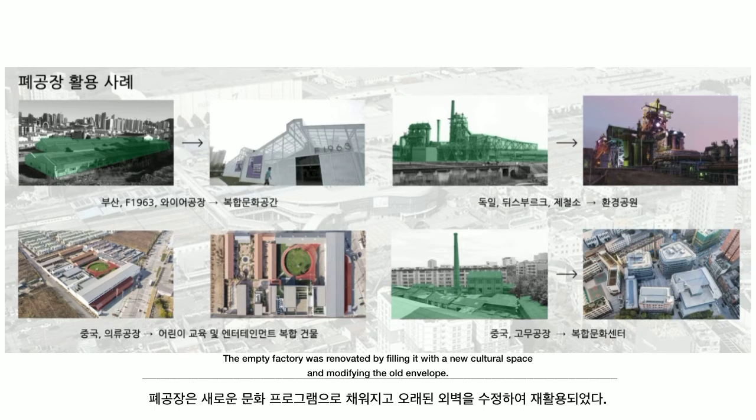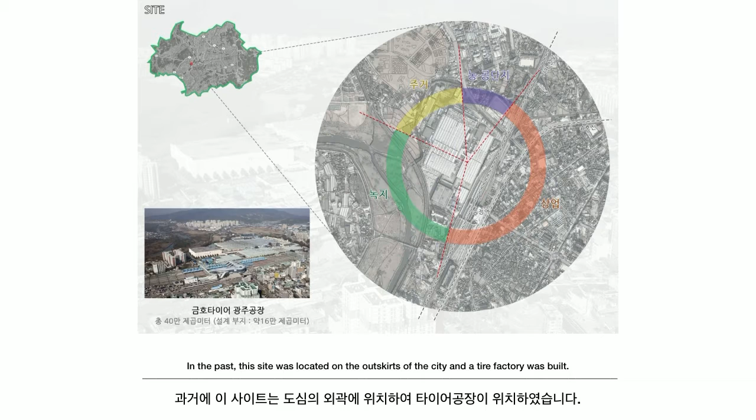The empty factory was renovated by filling it with a new cultural space and modifying the old envelope. The site I chose is Kumho Tire Gwangju Factory, located behind Songjeong Station. In the past, this site was on the outskirts of the city, and a tire factory was built there. The surrounding facilities include a large-scale housing complex, Songjeong Station as a transportation hub, Songjeong Traditional Market with Gwangju's signature taste, and an agricultural and industrial complex.

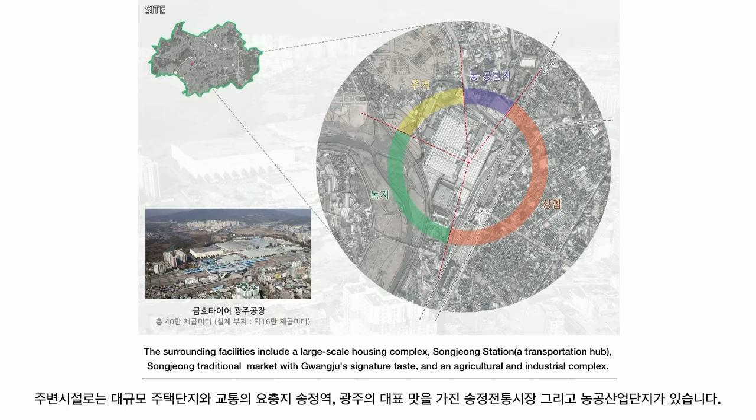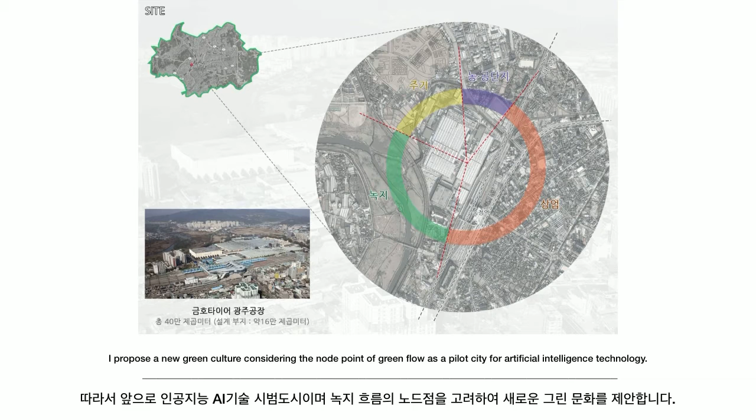However, cultural facilities are insufficient compared to residential facilities. I propose a new green culture considering the node point of green flow, as a pilot city for artificial intelligence technology.

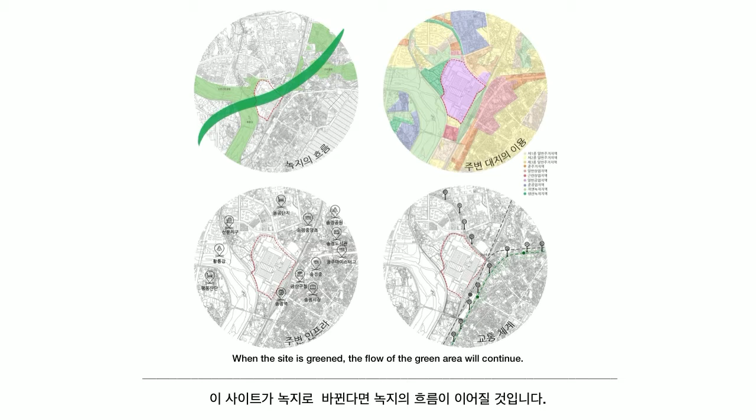Here is the site analysis. First, it is located on the green flow from the neighborhood park to the Hwangryong River. When the site is greened, the flow of the green area will continue.

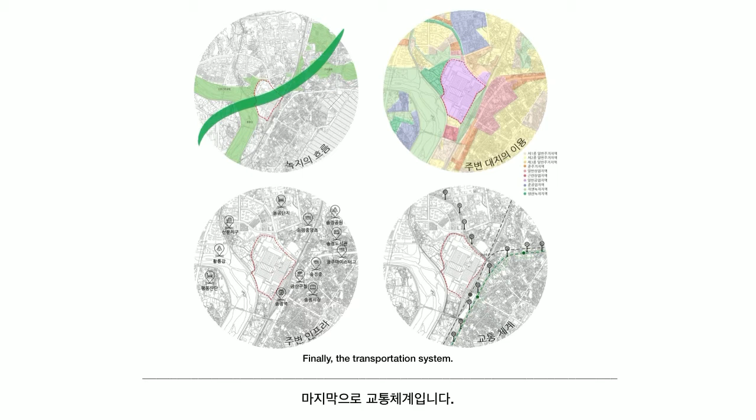Second, there are various land uses around this site. Third, to the west of this site is the newly developing Seonun district, and to the east is the relatively old Songjeong district. Finally, the transportation system: on the east side of the site there is a wide road passing by subway and ground rail.

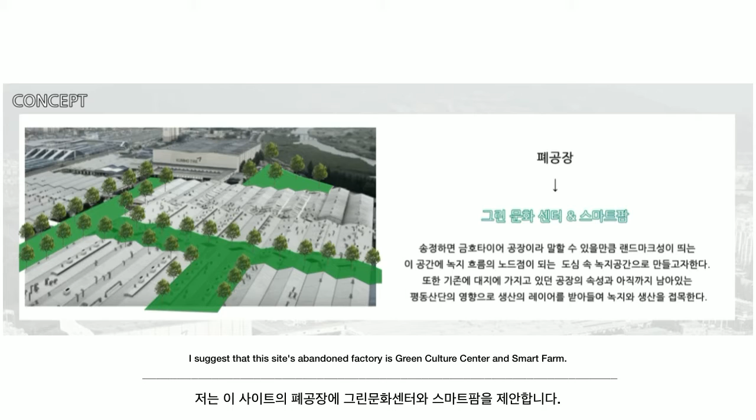I suggest that this site's abandoned factory become a Green Culture Center and Smart Farm. It has a landmark characteristic enough to say Kumho Tire. I will create this space as a green space in the city that becomes a node point of green flow.

In addition, I would like to combine green and production by accepting the properties of the factory on the existing site and the remaining production layer.

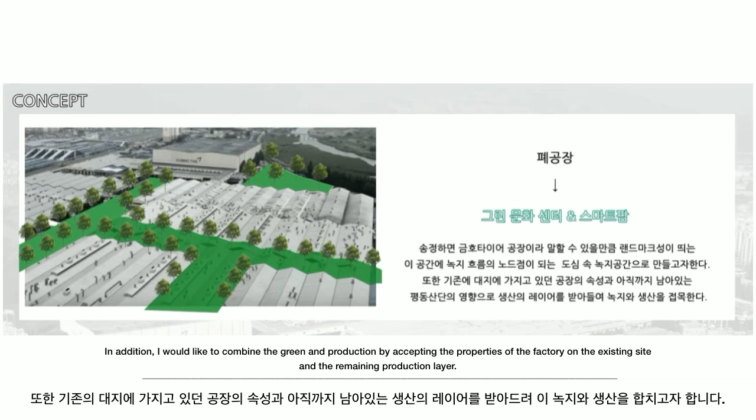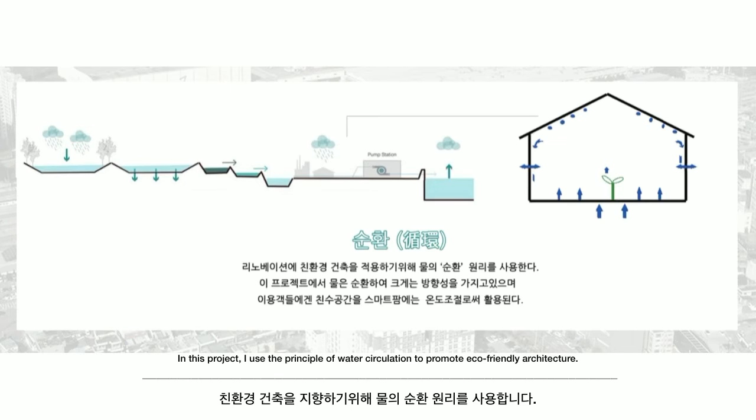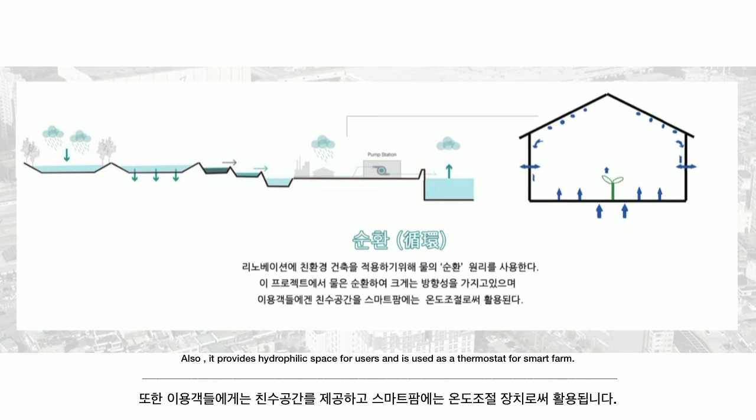Next is the concept: circulation. In this project, I use the principle of water circulation to promote eco-friendly architecture. Water circulates and has largely directionality. It also provides hydrophilic space for users and is used as a thermostat for smart farms.

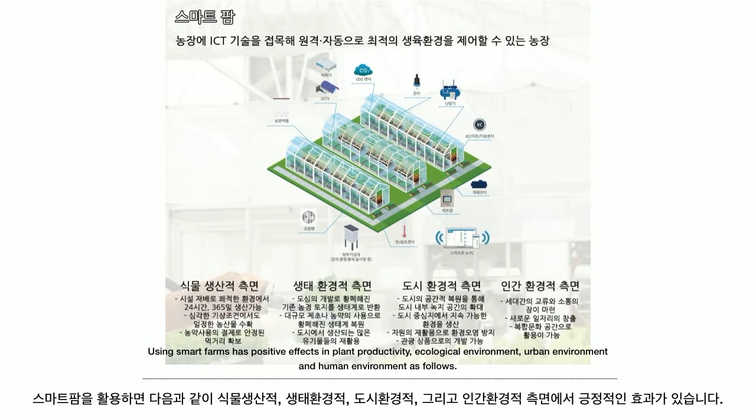I'd like to briefly talk about smart farms. A smart farm is a farm that can remotely control the optimal growth environment by applying ICT technology. Using smart farms has positive effects on plant productivity, ecological environment, urban environment, and human environment, as follows.

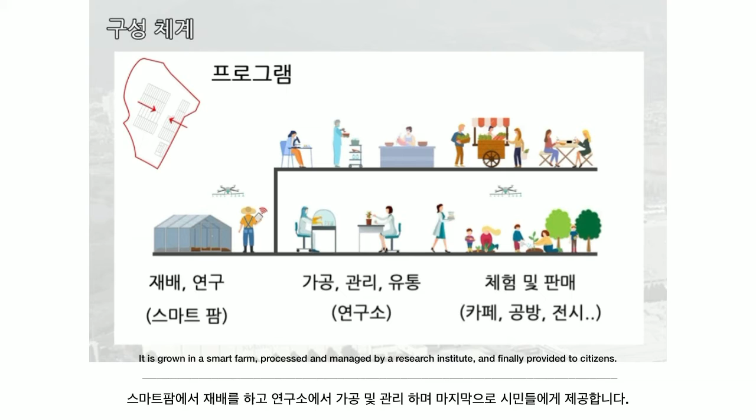The programs covered by the Smart Farm and Green Culture Center are as follows: crops are grown in the smart farm, processed and managed by a research institute, and finally provided to citizens, who can see, taste, and enjoy themselves in cafes, workshops, exhibitions, and more.

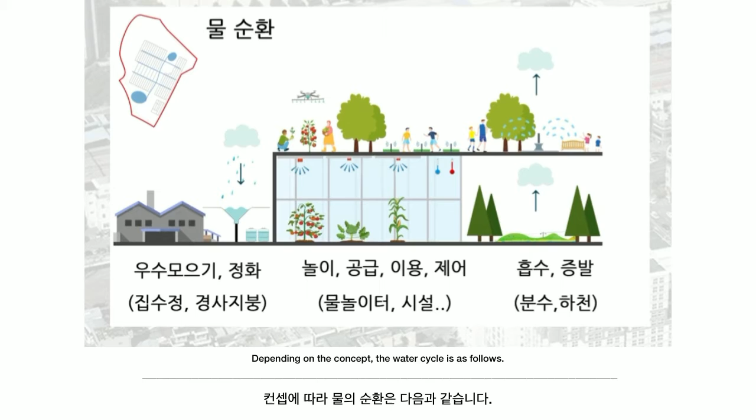Depending on the concept, the water cycle is as follows. Rainwater collected through the factory's sloping roof and collection pipes is used as a water playground, a temperature control system for smart farms, and water supply for plants. Used water naturally permeates or evaporates into the soil and moves back to nature.

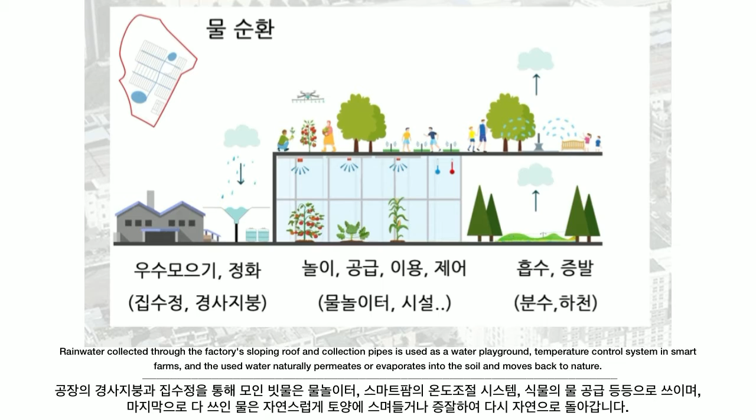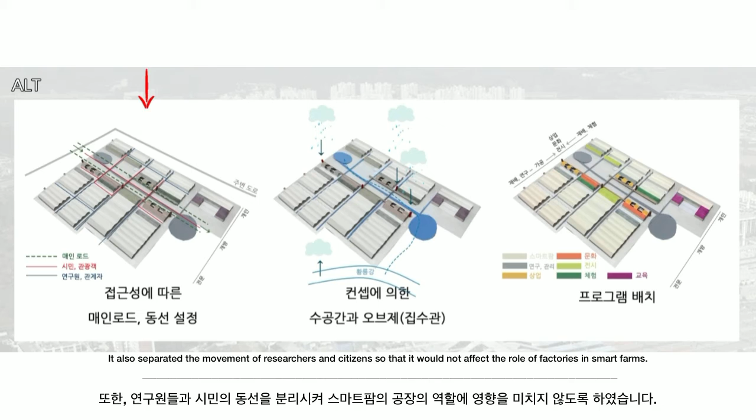The movement of citizens and tourists spreads around the center. It also separates the movement of researchers and citizens so it would not affect the role of factories in smart farms. Second is water space and objects according to the concept. The water on my site has directionality.

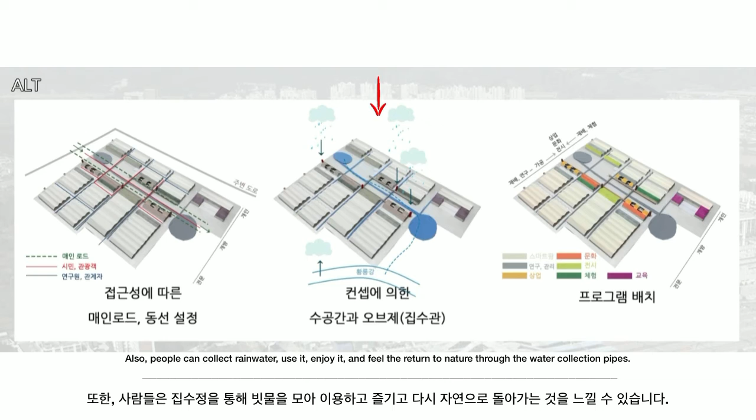Water flows along the main road from the small square to the main square, moving with people. People can also collect rainwater, use it, enjoy it, and feel the return to nature through the water collection pipes. Finally, the deployment of programs.

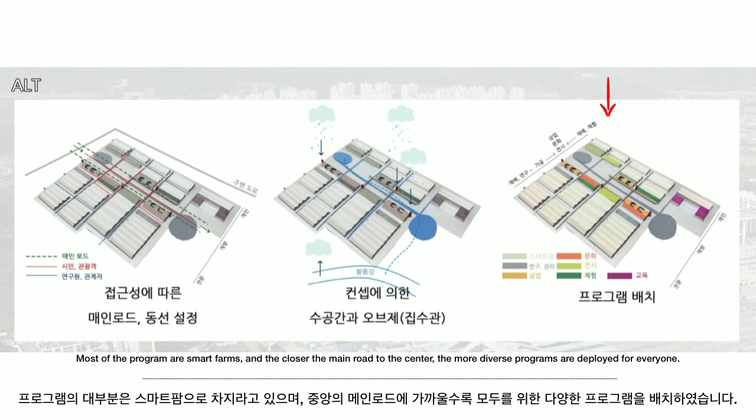Most of the programs are smart farms, and the closer the main road is to the center, the more diverse programs are deployed for everyone. In addition to smart farms, there are research facilities, commercial facilities, cultural facilities, exhibition space, experience space, and educational facilities.

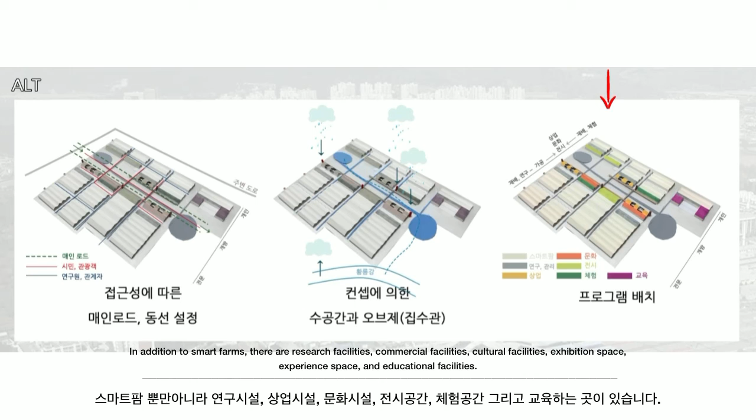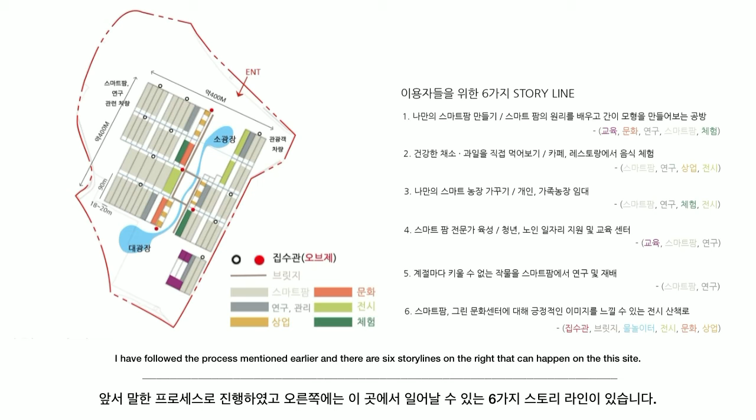This is the final design. I have followed the process mentioned earlier, and there are 6 storylines that can happen on this site. The plans for each module are as follows.

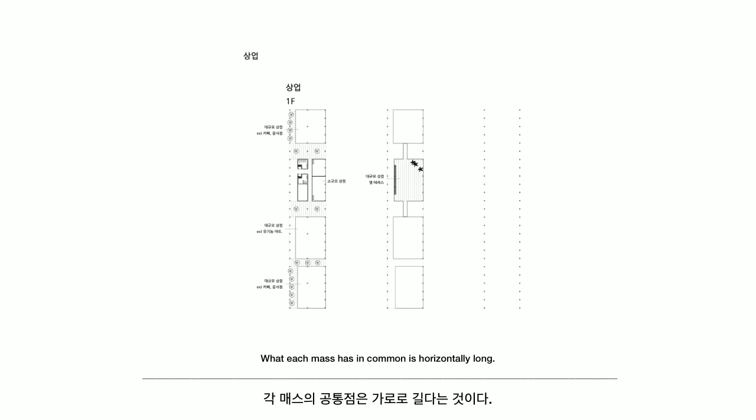What each mass has in common is that it is horizontally long. You can see in the layout that the middle hole is placed, and the mass is separated according to each function.